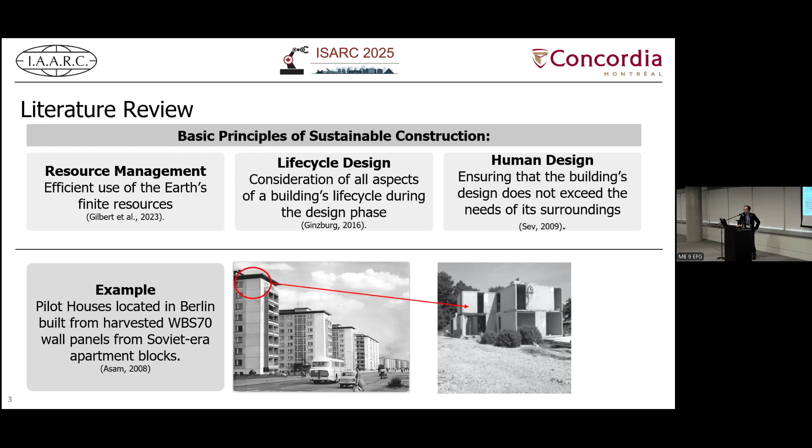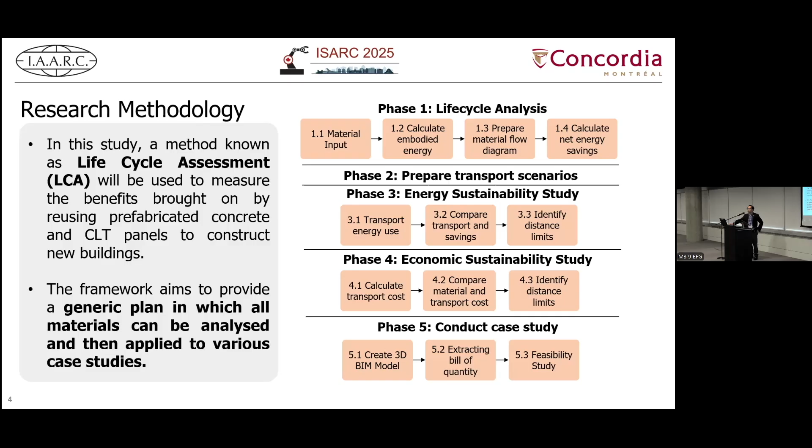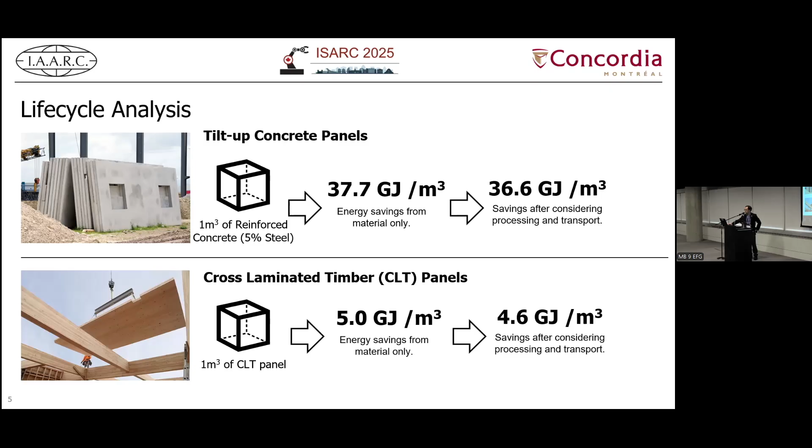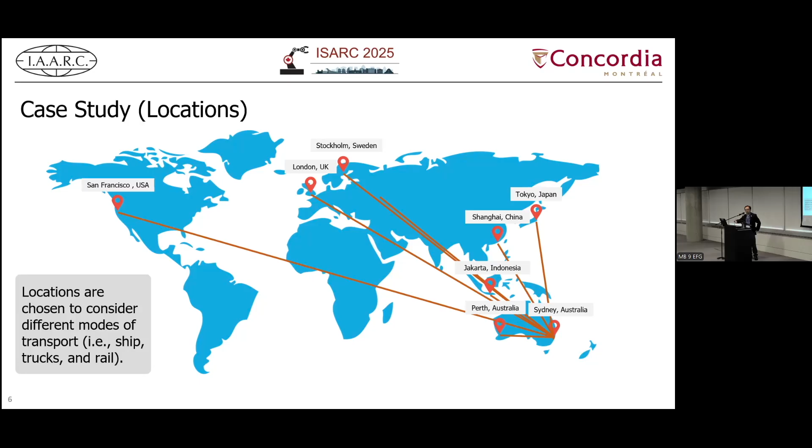And then also within Australia, say from Perth to Sydney, that's similar to the distance from Vancouver to Montreal. And then we will rely on the railway for transport. But if we try to source the material from the local area, then we can definitely use trucks.

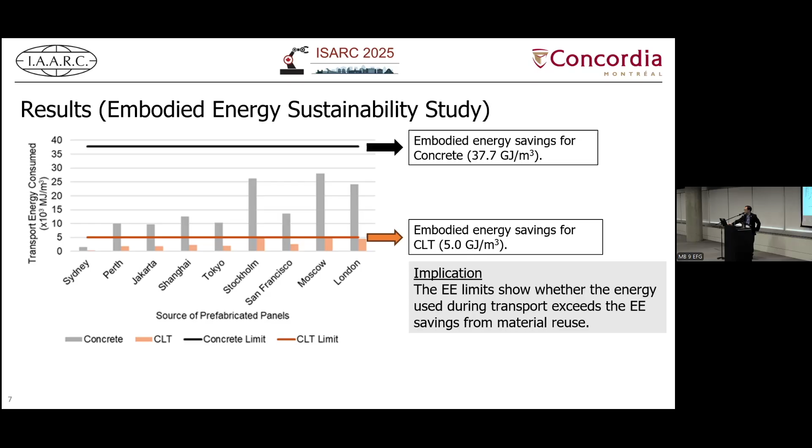So here, just to give you a brief update about the results. As you can see here, we can look at the different types of embodied energy savings. Say for the concrete, as I mentioned before, it's about 37.7 gigajoules per cubic meter. And then for the timber panels, it's about 5 gigajoules. And then based on the life cycle analysis, we come up with some results.

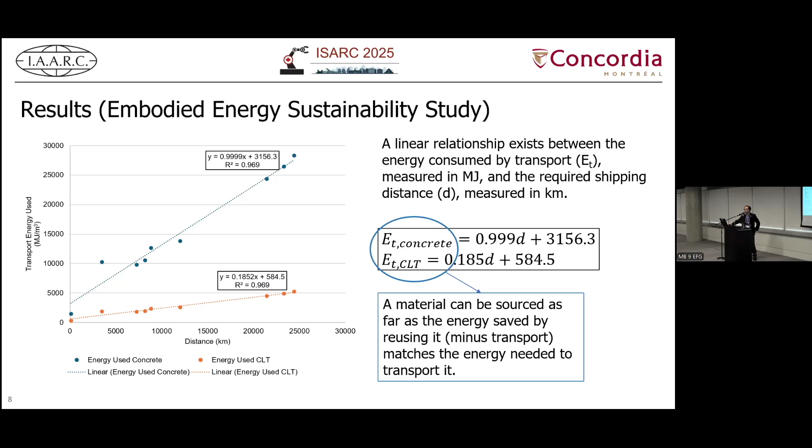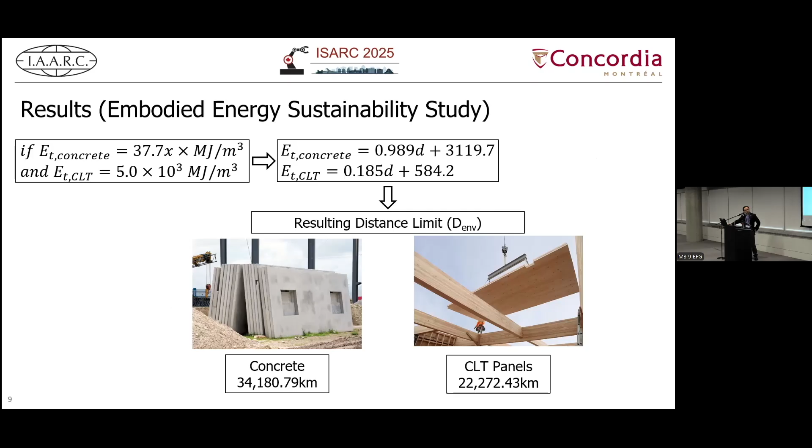So as you can see here, this is about the modeling between the travel distance, energy saving, and the cost. All right, and then here are a bit further results. So in this case, if we look at the embodied energy sustainability study, we try to look at the energy saving and cost saving, and then finally we try to predict the maximum distance if we try to have a good balance.

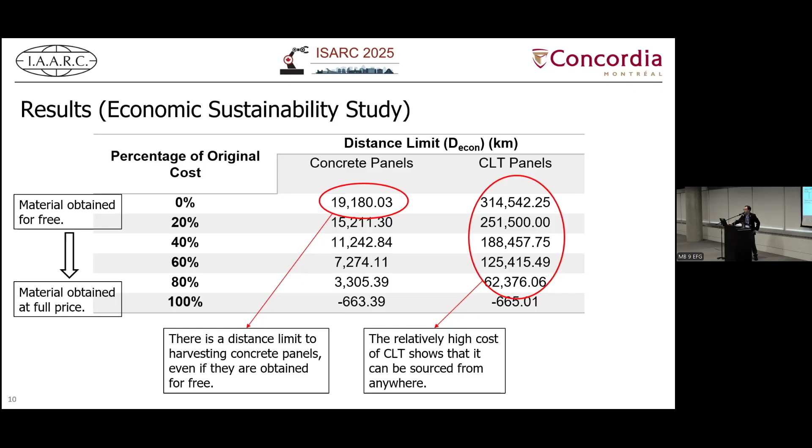And then here are some results. Say if you look at the cost of the concrete panels, once we increase the cost of sourcing the raw material, then pretty much you are going to reduce the limit for the maximum distance. On the other hand, the timber panels have quite a different pattern.

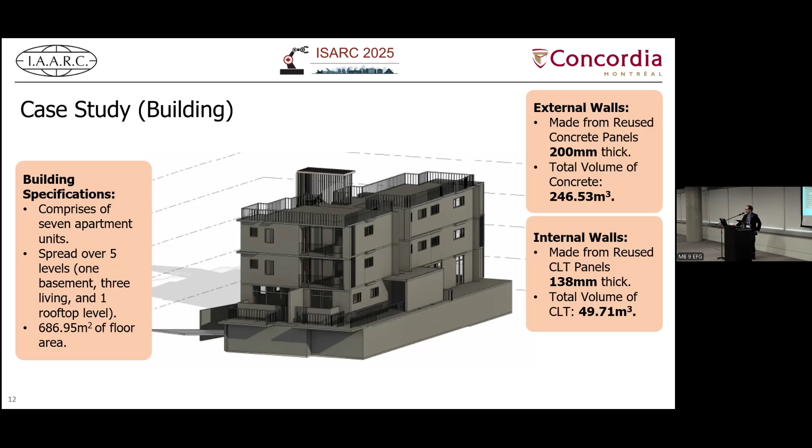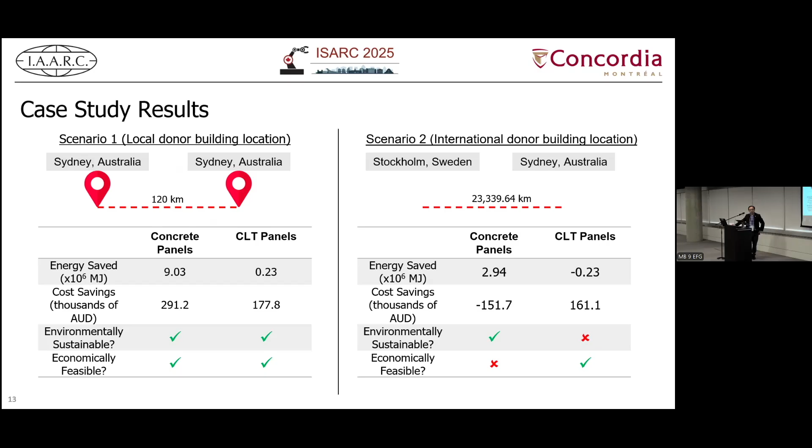All right, I'll just skip quickly to the case study. So in this one, we used a 5-story building in Sydney. The external walls are reused concrete panels, and the internal walls are reused timber panels. So as a result, we could look at 2 different scenarios: sourcing material from a local area in Sydney, only about 120 kilometers, versus another case with the material sourced from Europe.

And then apparently you're talking about a trade-off between the travel cost, the cost of the transportation, and also the environmental sustainability results. Okay. All right.

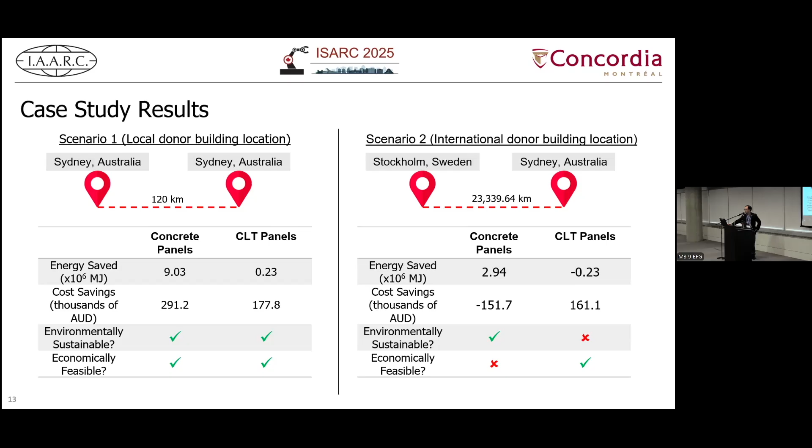So just to quickly summarize this preliminary stage of the study. People are talking about sustainability and carbon reduction. But if we specifically look at the demolition stage, it's way behind the other parts of construction, if you look at the big picture of the life cycle. And also, if we try to reuse prefabricated materials, we have to look at both the benefits for carbon and also the energy and cost savings.

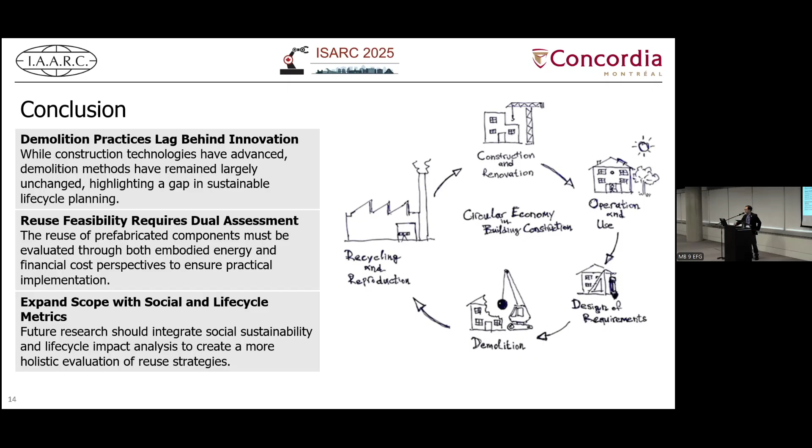And then in future research, Mikael is also trying to look at the scope of the work and try to cover more areas in social and life cycle aspects.